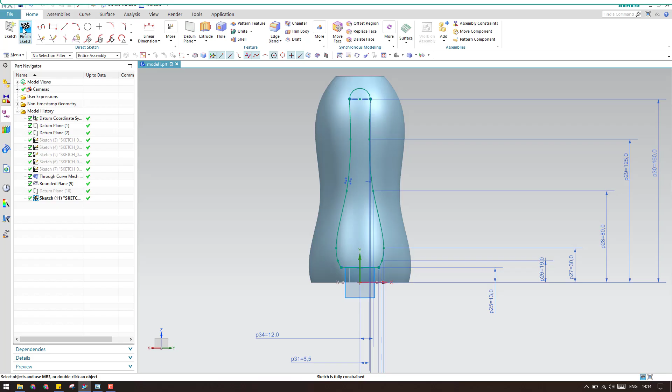Now what I will do is extrude this sketch. Go to extrude, select this, make it a sheet, and extrude so that it comes out of this bottle surface. This should be more than enough, click OK.

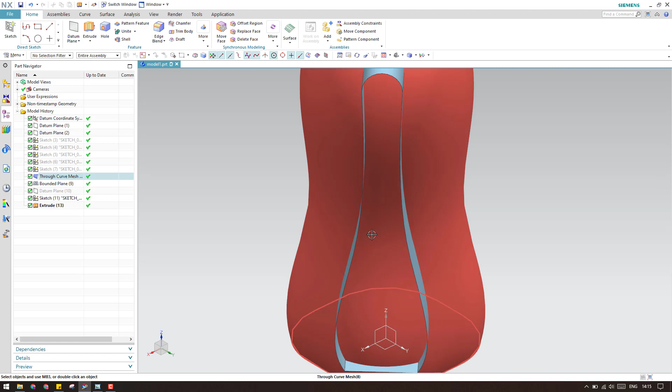Now as you can see here, we have two sheets, one is this and another is this. Now I have to offset this with 3 mm. Let us go to surface and offset surface. I'll select this surface and inside it will be 3 mm. Give 3 mm and click OK.

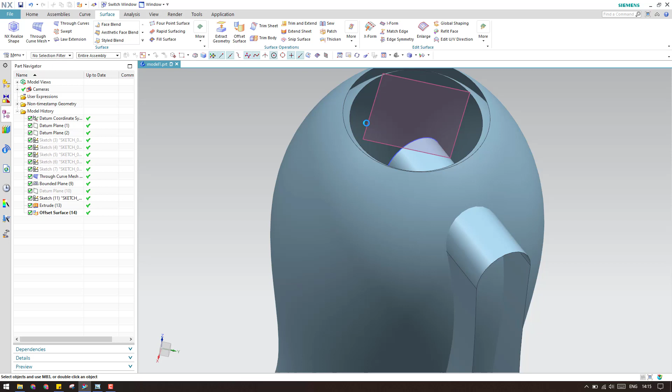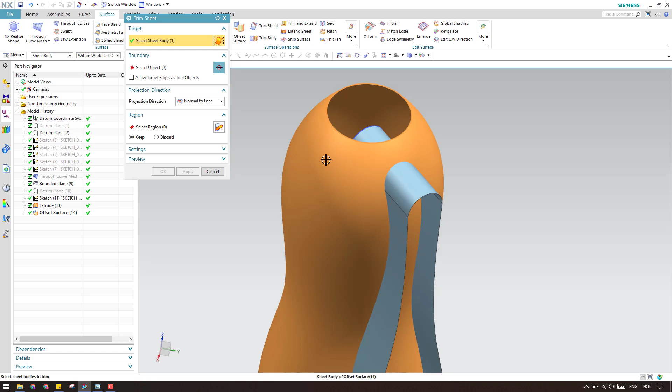As you can see here, inside there is one more surface which is developed. Now I will trim the outside, the inside bottle, so that it will be proper in shape. I will hide the outer surface, go to trim sheet, this is my trimming surface and this is the boundary, and this should be discarded because I want to discard this. Click OK. Now as you can see here, that is completely discarded.

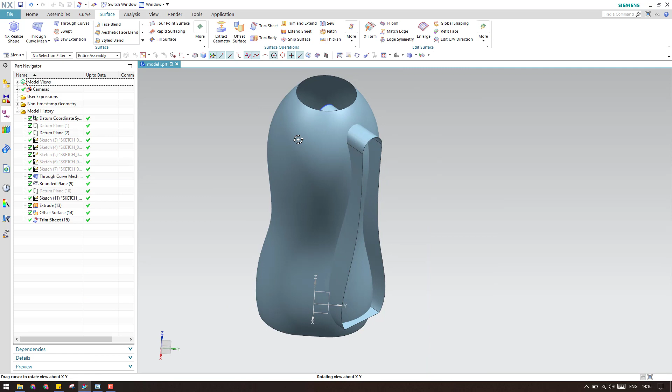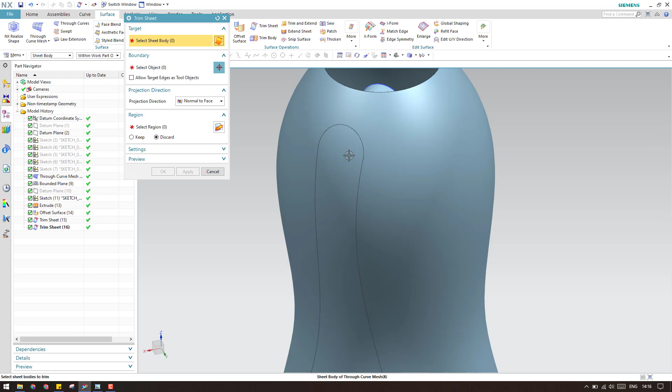Now let us switch on the outer surface. In the outer surface we need to trim this. Let us go to trim sheet and select this, my body will be this, and it should be discarded, as you can see here. You can just follow my instructions so that you will get to know what I am doing by the end of the video. And again I am going to trim this sheet, and this should be discarded by selecting this.

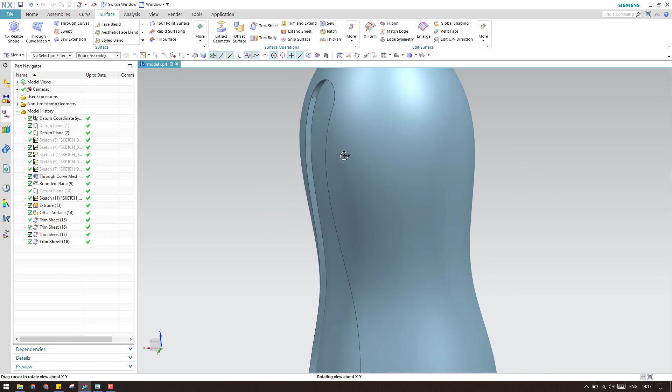Click apply. Now at the end what we have is we have to trim this using this, and it should be kept. So you can see here there is a slot which is generated, and from the inside, if you can see, this slot we just need for our design.

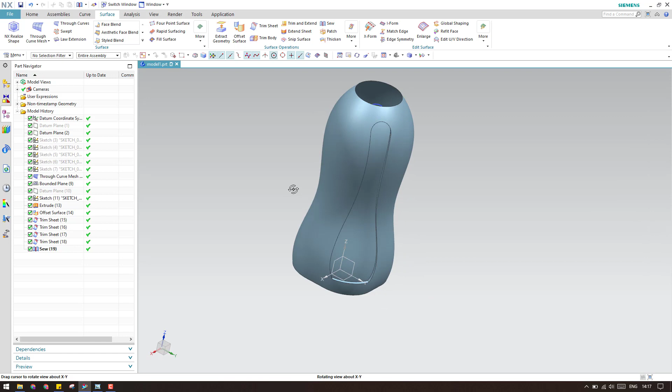So what I will do is I will just sew these sheets, only this sheet and this sheet, so that I can pattern this curve sheet. I just need this complete sheet on the 4 sides, so I will do a circular pattern for this.

Let us go to menu, insert, and associative copy. Here you can find pattern geometry. There is a lot of difference between pattern geometry and pattern feature. You can see here pattern geometry, pattern feature, and mirror geometry. There are a lot of differences, I'll explain this in upcoming videos.

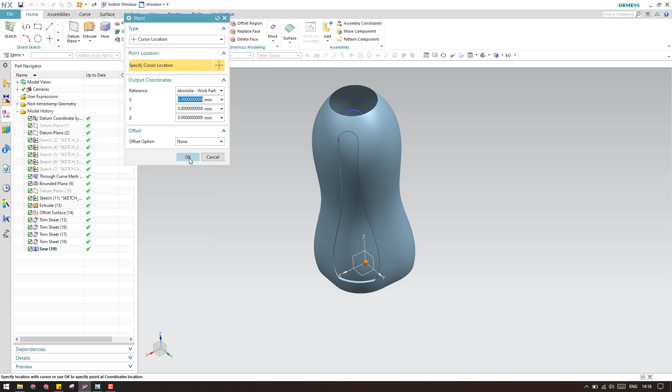So I'm going to make a circular pattern of this sew. I've selected this surface, and now let us give an axis, with the axis point at 0,0,0. As you can see here, 4 surfaces are coming. You can give the count and pitch, 4 as the count and 90 degrees as the pitch angle. Click OK. As you can see, these surfaces are developed, and I want to trim this surface to make a slot similar to this.

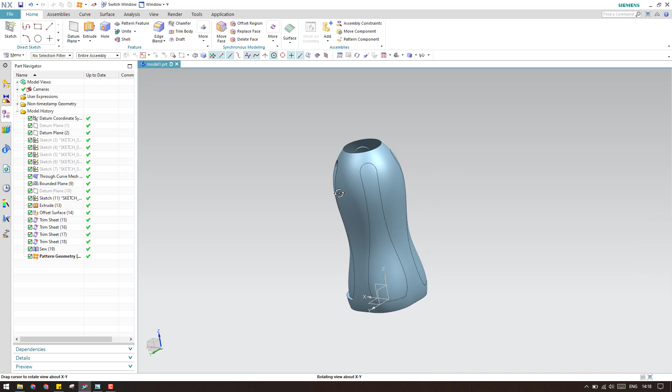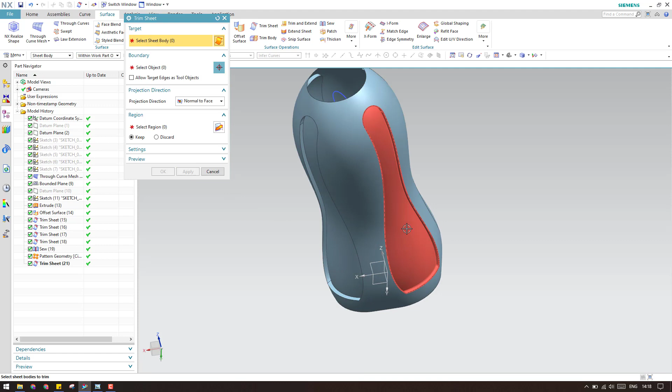So I will go again to trim sheet and select this. Now let us select this inside surface. You can just forget about this error and click apply. As you can see here, the sheet is trimmed.

Now we go the same way and do it on all the sides. Okay, as you can see here, all the slots are developed.

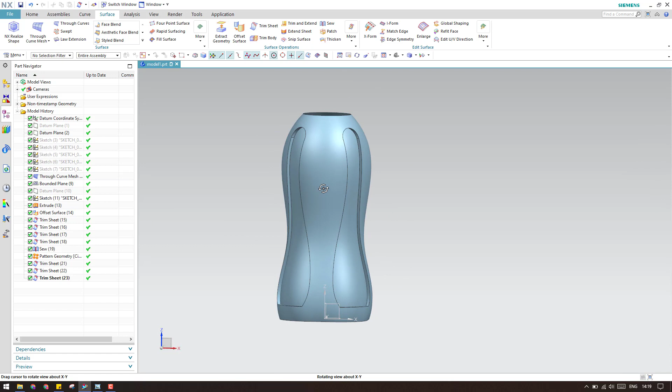Now I will try to make one more feature on the bottom side. I will go to sketch and select the bottom plane. You can select either surface or plane, both are the same. I will make a rectangle, a square with a side of 55 mm. You can have 55, 55 and 0, hit enter.

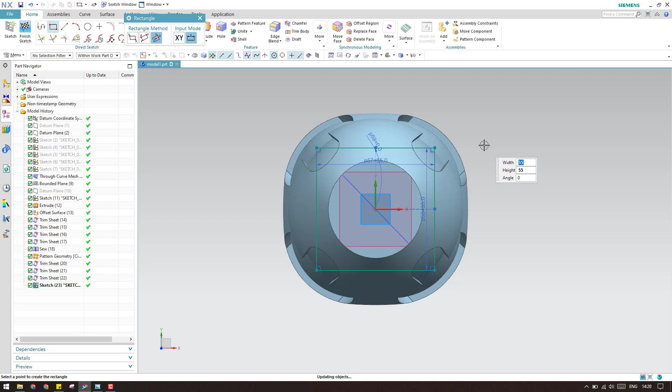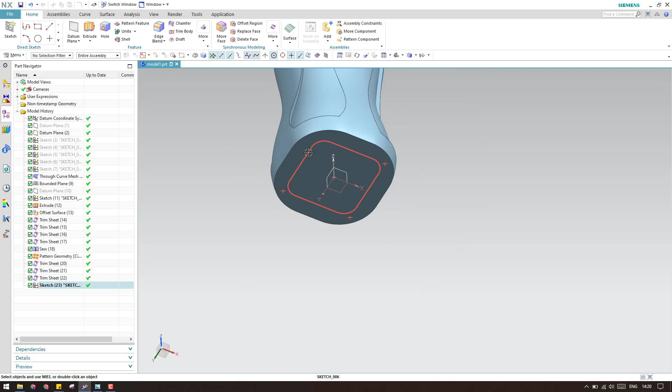Now let us give some fillet. From this to this it is 10, from this to this it is again 10. Okay, now finish the sketch. As you can see here, our sketch is over this plane.

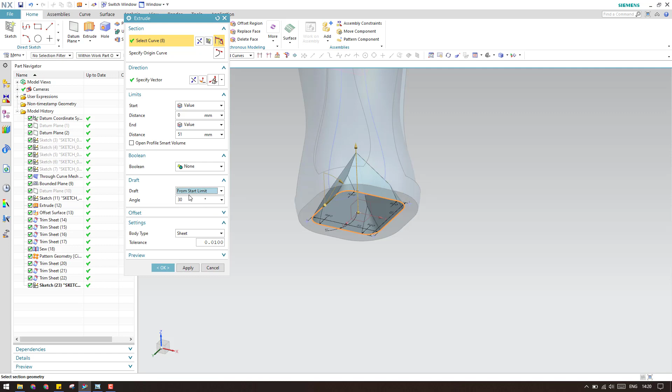So I will go to extrude and select this sketch, and this should be a sheet, and we need to give some draft for this. Let us give a draft from the start limit with 30 degrees, and the length should be 12 mm. So let us give this as 12 and click OK.

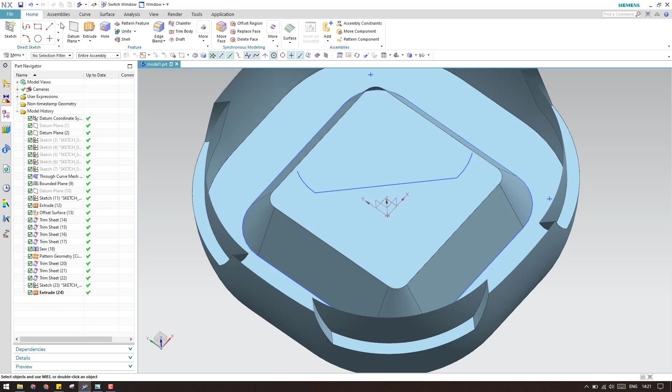Now as you can see here, there is a sheet which is developed, so it's not visible. You can go to view and start clipping a section so that you can see this properly. As you can see, our sheet is developed over here. What I will do is trim this sheet, this should be kept, so I will select keep, and this is our boundary. Click apply. Now we'll make a bounded plane for the top one.

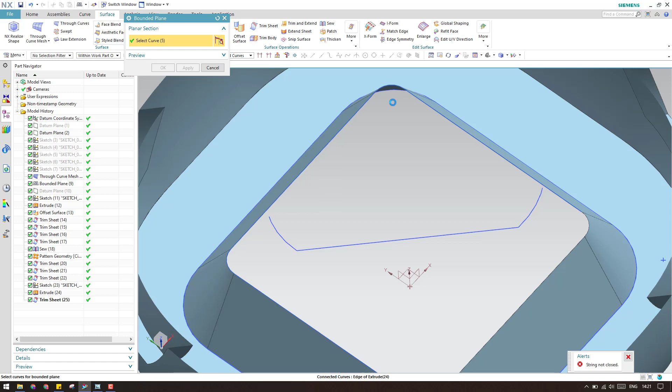Okay, as you can see here, it is completely filled. So now we can remove the clip section, and we are able to see the entire model. Now the top portion of the bottle we have to do.

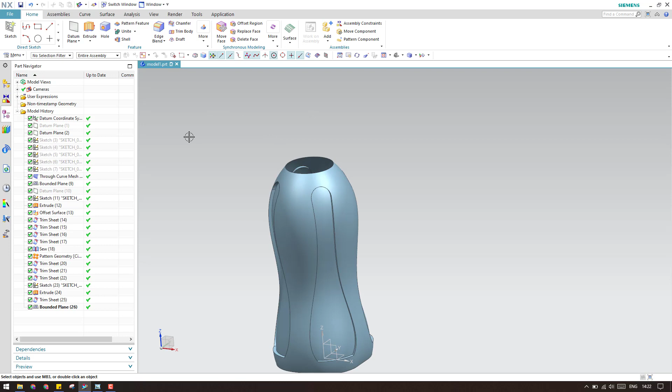What I'll do is I'll just go to sketcher environment again and select any of the plane which is on the vertical and click OK. Select a vertical plane, click OK.

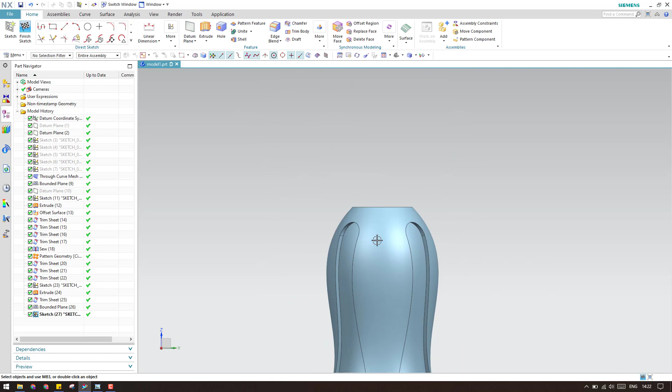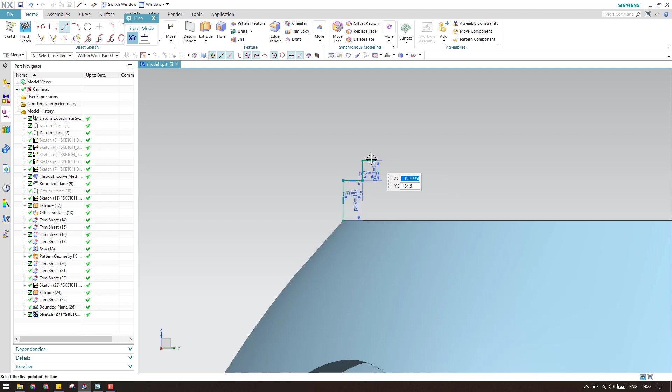Let us go to line and start creating a line. So here is my line with the 3 mm, and this should be 1.5, 0. This is again 1.5 with 90 degree, and this is 1 with 0 degree, and here it should be, let us give this dimension as 25.

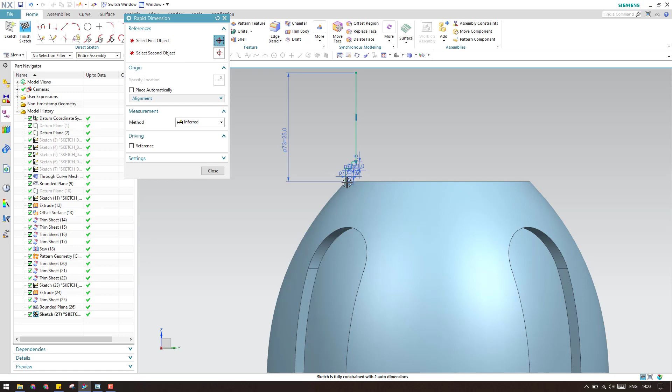So let us give this dimension. Let me make it on this plane. So what I will do is I will just show all these curves and press C for constraining.

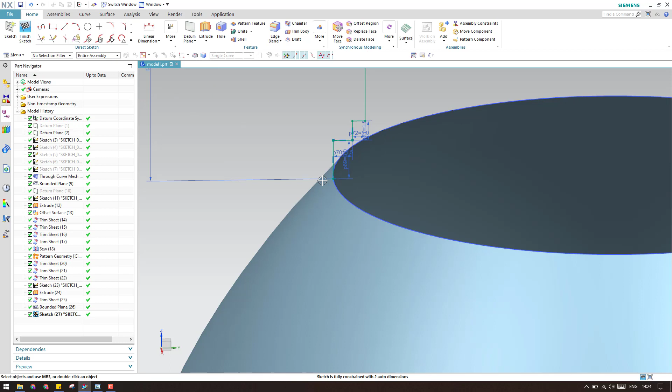Before constraining, what I will do is I will just go to intersection on the point. So we'll create a point here, and let us create a constraint with this point and existing point. Okay, now it is fully constrained.

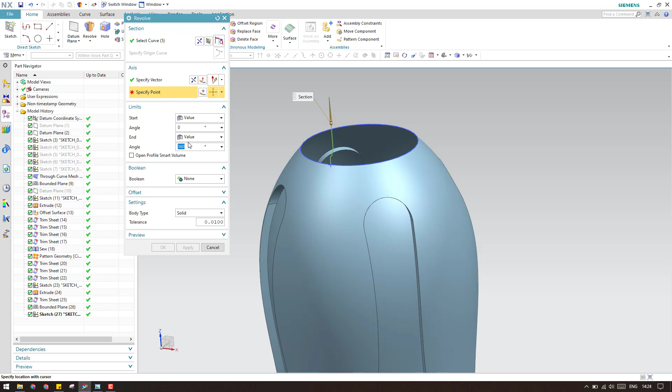So what I will do is I will just finish the sketch, and now let us revolve this. So let us go to revolve, and my curve will be this, and the vector will be in the upward direction, and there should be a point which is at 0, 0, 0 location, and let us make this as a sheet and click OK.

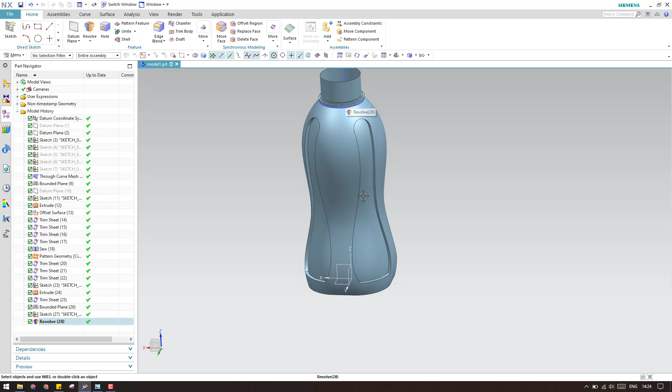As you can see here, our model is almost ready. Now we are left with only edge blends, so it will look better with the edge blends. What I will do is, before giving an edge blend, as you can see here, this is a separate sheet and this is completely separate sheet, and these are the different sheets.

So what I will do is, in order to make it a single sheet, let us go to surface and go to sew. Sew will unite all the sheets into a single sheet. So now we have this complete sheet in a single body. Let us hit Ctrl W and hide everything and show only this.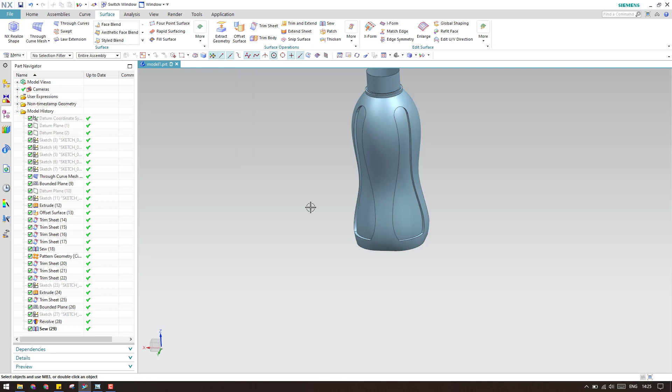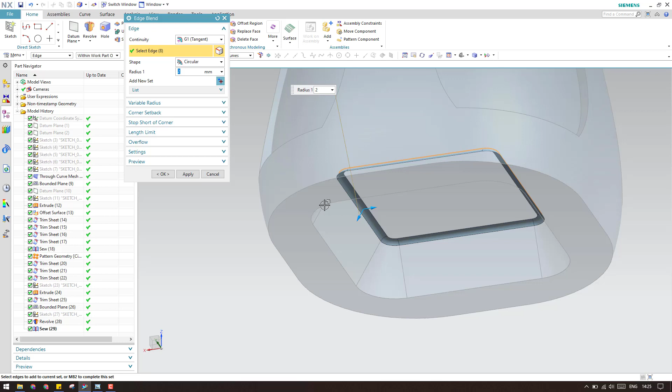Now we have multiple edge blends which we need to provide. So I'll start with the edge blends. Let us give this edge blend. Oh, it should be less. Let us start with 6 mm.

And here as well around 7.5. Let us give this as 4.5, or it should be 5. Click apply.

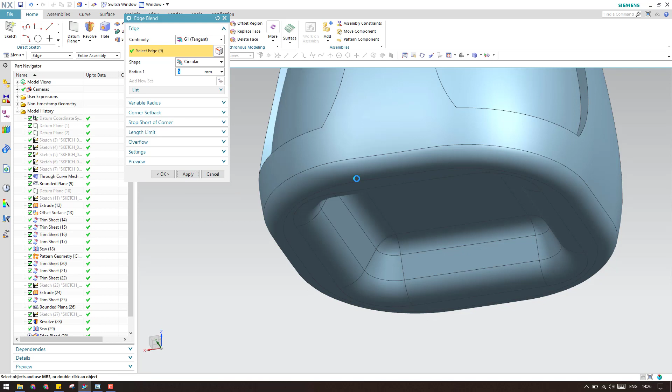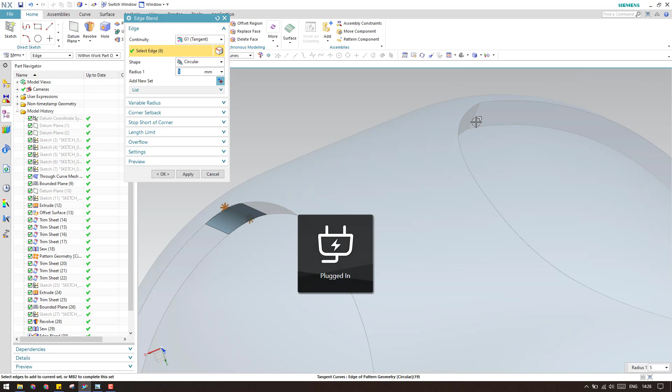Now what I'll do is I'll just give this and this on all the sides. You can see all the sides it is selected. Now if you want, you can just increase the value to 10.

So let us give an edge blend over here. Now we have this, and let us give it as 1 mm. If it becomes more, we can just reduce it in the future.

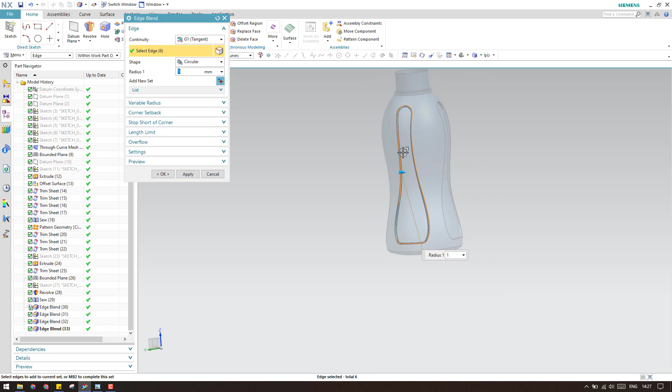So let us give on the other side as well. Okay, click apply, and we have to give edge blend on the top side as well. You can see the top side.

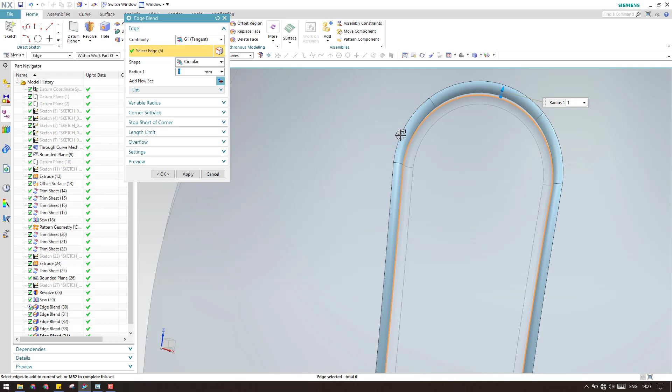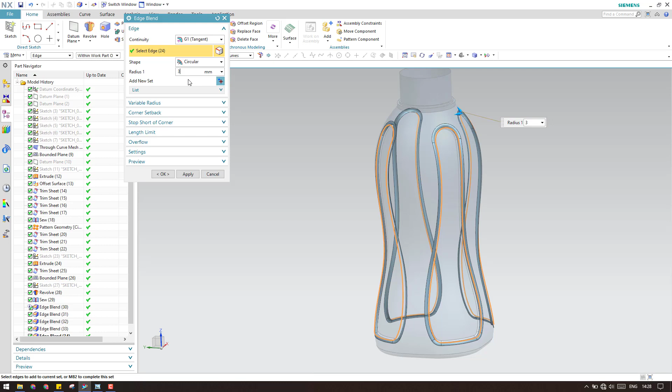Okay, now the radius is 1 mm. Let us increase it to 2 mm if possible. We can give it, okay, 3 mm. Let us give 3 mm and click OK.

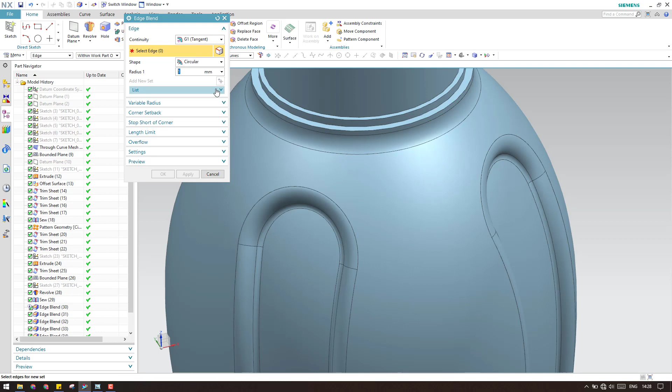So now it is looking better compared to previous. So let us give edge blend over here as well, and hit OK. Let us give 1 mm over here and here as well.

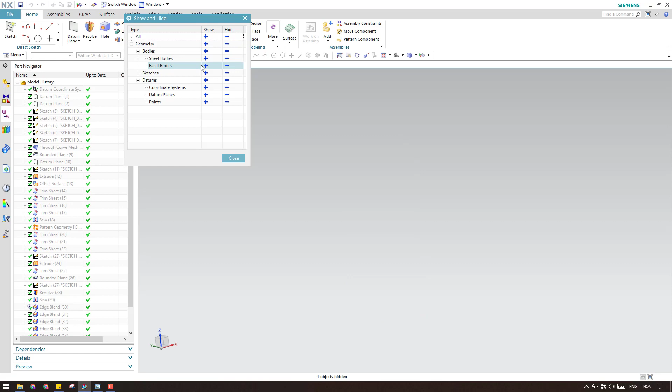Okay, so this is too much. Let us give 0.5. Click OK. So now as you can see here, this bottle is completely ready. So click Ctrl W and hide everything, then show sheets.

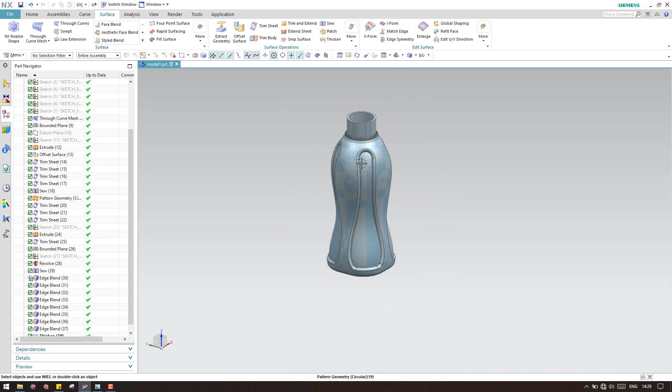Now let us give some thickness to this so that it will be completed. So let us go to surface and thicken. Now we have to select surface, and let us keep it as 2.5 mm and hit OK. Now this is having some amount of thickness, as you can see here.

2.5 is too much, so let us reduce it to 1 mm. I think 1 mm looks better. So hit Ctrl W and hide everything. Now we have a solid because it is thickened with 1 mm. So this is our bottle, guys.